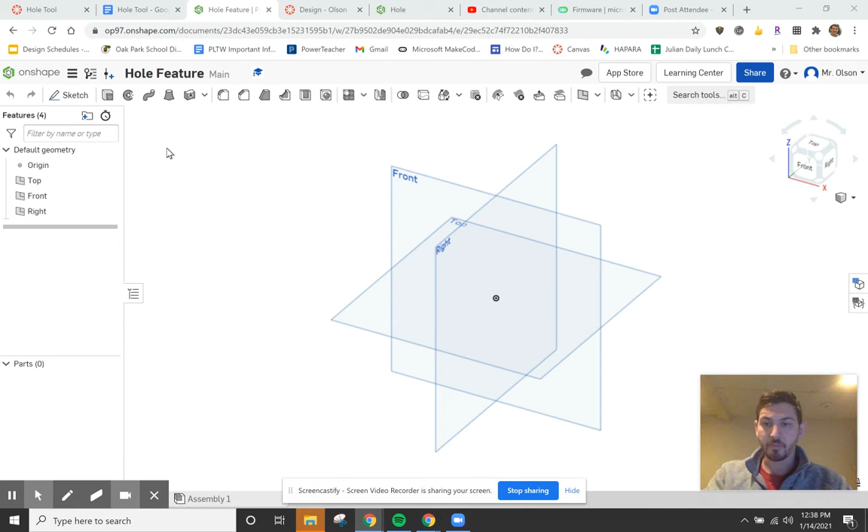Okay, so I'm going to start by getting rid of the planes I don't need. I'm going to change to a 2D view, and I'm going to create a new sketch. And so I'm going to choose my front plane. Go ahead and hide that plane now that I've created my sketch.

And let's go ahead and just make a cube. We're going to make the holes on that cube. I'm going to go ahead and make a 5x5 cube, so I'm just going to create a rectangle. I can type in 5 because I have that box around there, so I'm going to type in 5 and hit enter. Notice the box is switched, so I'm going to type in 5 again and hit enter again.

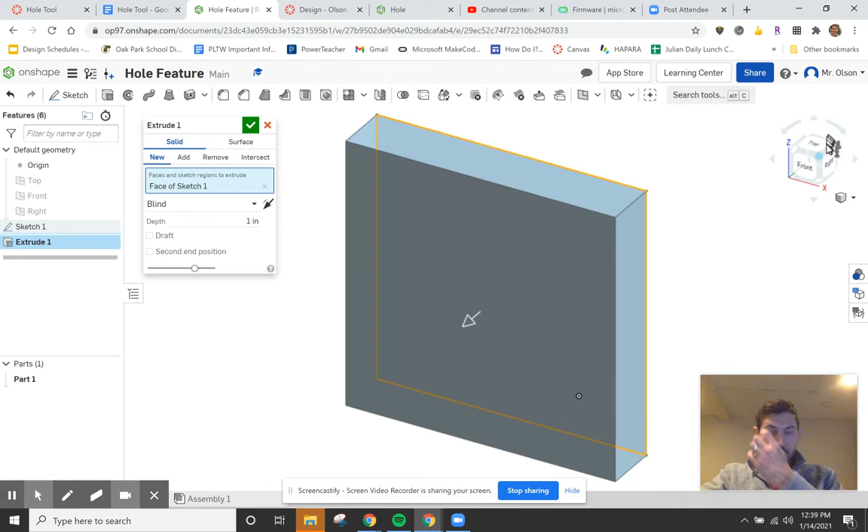And now I'm ready to extrude, so I'm going to finish my sketch. I'm going to extrude this shape. I'm going to click on my shape, and change to my isometric view here. And then I'm going to make it a cube by going out by 5 inches in depth.

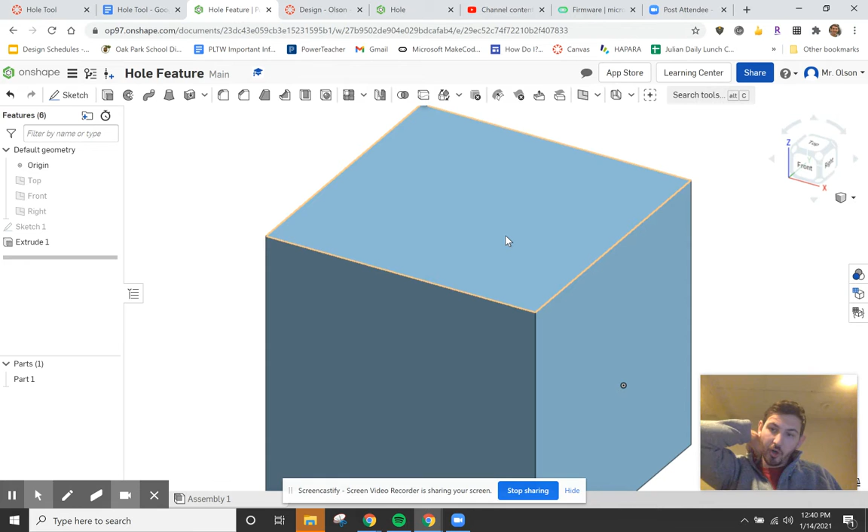Okay, so there is my cube. So now to make a hole on my cube, all I've got to do is create a new sketch, and I'm going to tell it where I want the hole to go by placing a point. So I'm going to create a sketch, and click on the face of my object that I want to create the hole. Let's say I want to create the hole on the top. I can click there. Notice that I now have a sketch plane along that top part of the cube.

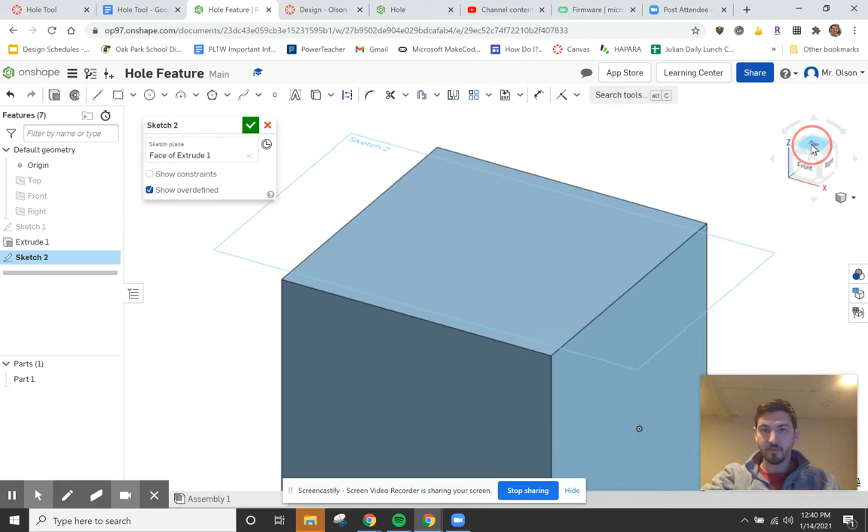I'm going to switch to my top view now, because that's going to look down in a 2D view. There you go. And then what you need to put is a point, and basically that point's going to be the center of your hole. So I'm going to click on point, and select a place in the middle of my cube. Now, let's say I want to center this point and center the hole here.

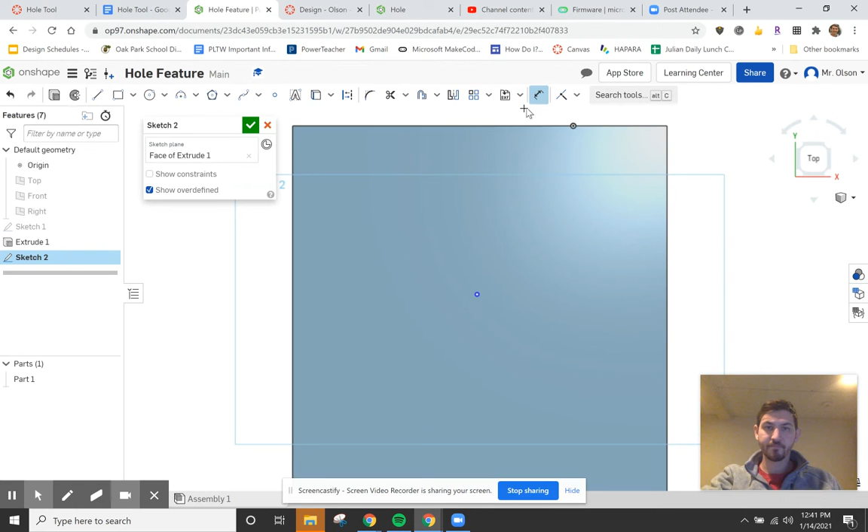You're going to want to use your dimension tool, to say, hey, I want it to be a certain distance from the top to the point. I'm going to click on dimension, click on the top of my cube, or that top line there. I'm going to drag down, and click again on the point, and now I can tell it how far I want it to be. So I'm going to click over here. And the middle of a 5x5 cube, or in this case the square, is 2.5, so 2.5.

Now that is centered from top to bottom, but now I need to center it from left to right. So I'm going to do the same process, but this time I'm going to click on the left line here. I'm going to then click on the center point, and that's also 2.5. So now I have it directly in the middle of my cube.

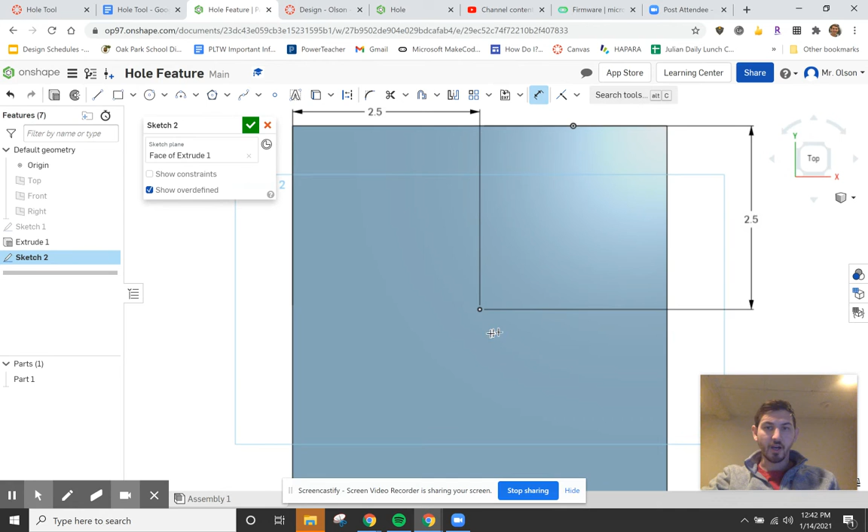Okay, I'm done with my 2D part of this, so I'm going to finish my sketch. I'm going to switch to the 3D view just so you guys can see it a little bit better, and you can see my point right there. Now I can go ahead and use the hole feature up at the top. That hole feature is located right here, in the middle of your toolbar.

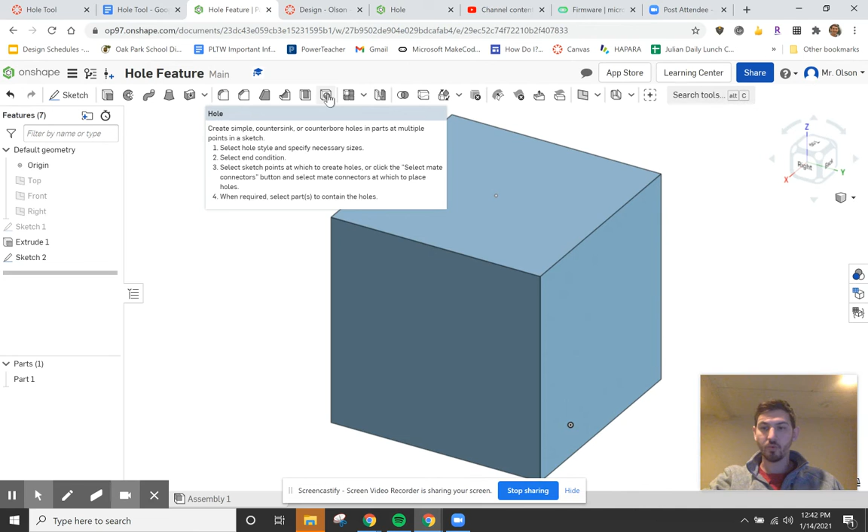And so using this tool, you can make different types of holes. You can make simple, countersink, or counterbore, and depending on what you want, you're going to select it. So I'm going to click on hole.

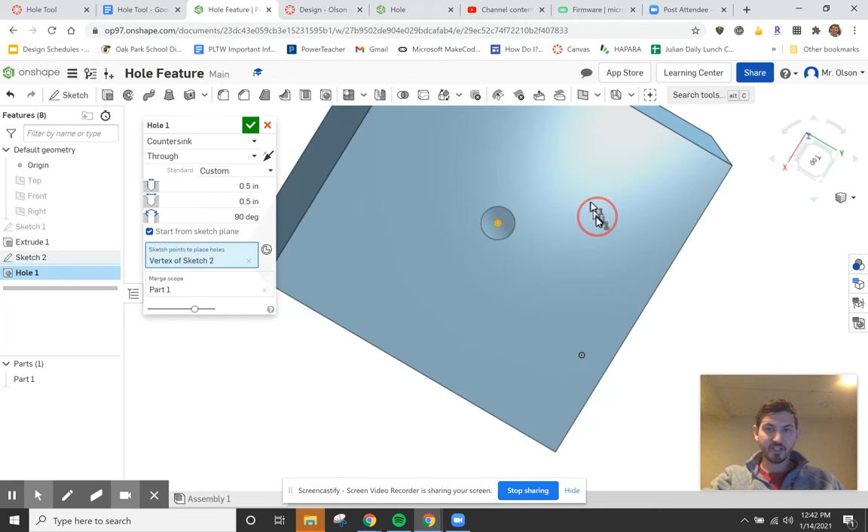Okay, now in order to place my hole on the point, I'm going to go over to my point and click. There you go. And right now, if I change my view a little bit, that's just a simple hole. Do you see how that's just a straight down hole? Basically, this is what if you were to use the extrude tool with a circle, that's what you're getting, is that basic hole.

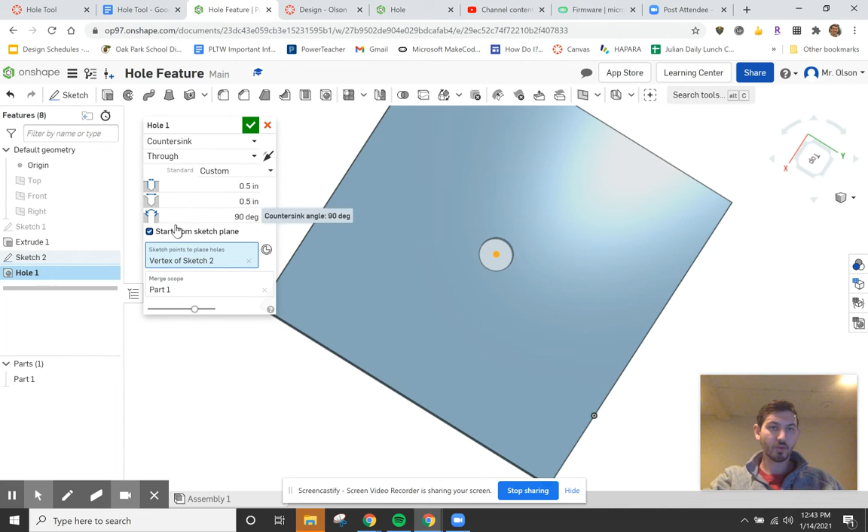This is a better way of doing it still, though, because you have more control over the hole itself, especially when it comes to some of these other features. So over here, you get to select the type of hole.

It looks like actually that was a countersink. I don't really see where that's a countersink. So you have simple, which is straight through like this. You have counterbore. I see why, because your diameter is the same as your countersink diameter.

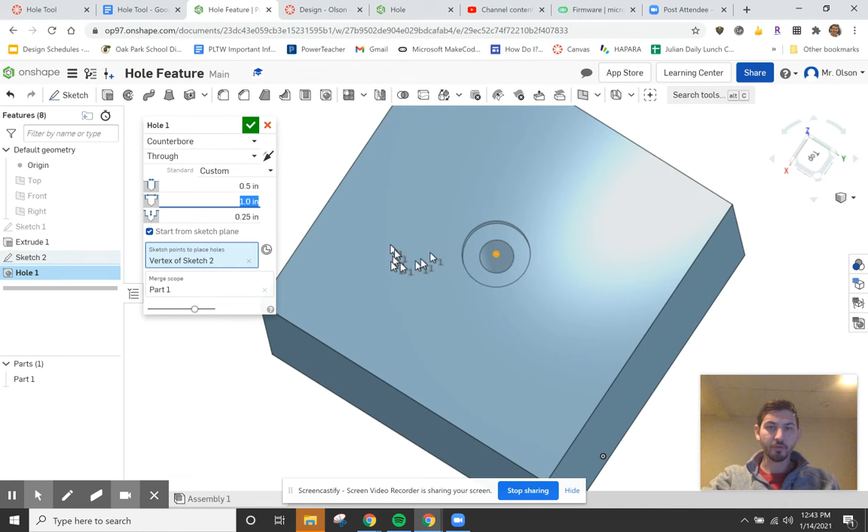And so the counterbore diameter has to be bigger than your diameter of the hole. So you can see what that does is it creates this counterbore. So what a counterbore is really used for is when you have, like, a screw or something that has a headpiece that you don't want popping up above the surface. That allows it to sit underneath the surface but still drill into the object itself.

Okay, and so this is your diameter. So my diameter of my screw is 0.5. That's what I would want here. This would be the screw head. And then this would be the screw head depth.

A lot of times, since you're pretty new at this, if you're doing something specific, it's going to give you those dimensions for you. So you're not going to have to be like, what are they? They'll probably be given to you. But it's nice because if you really have control over what size screw you want, especially when you are creating your own objects. Okay, so when you're done...

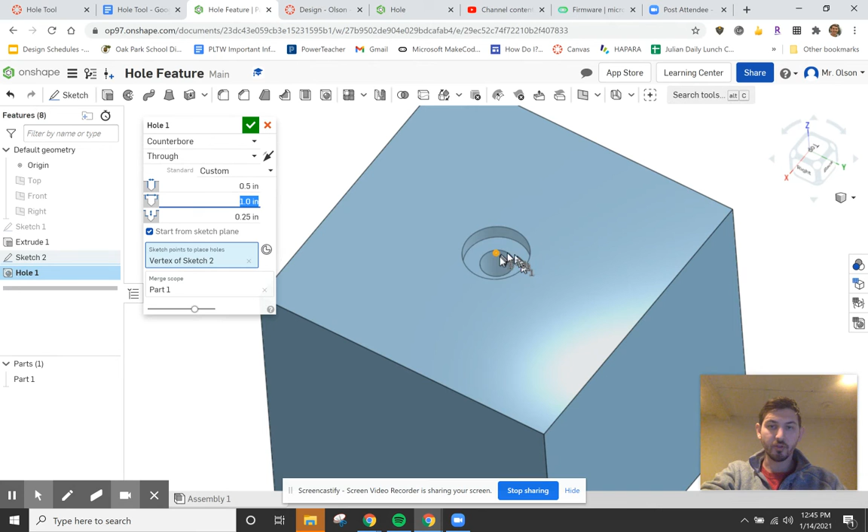Oh, you know what? And the other thing I wanted to show you before I get done with this termination here is through currently. So if I look at this screw hole, it's going into this side and it's going all the way through my object.

So here, if I go to the bottom, you can see my screw hole goes all the way through, and that's a diameter of 0.5 right there. It gives you a better idea of how that counterbore is different.

If you only want it a certain depth, you go blind, and then you can say the depth right here, how deep you want that hole to go. So maybe I want the screw to be a 1-inch screw. Now my screw hole doesn't go all the way through. It only goes an inch into my object.

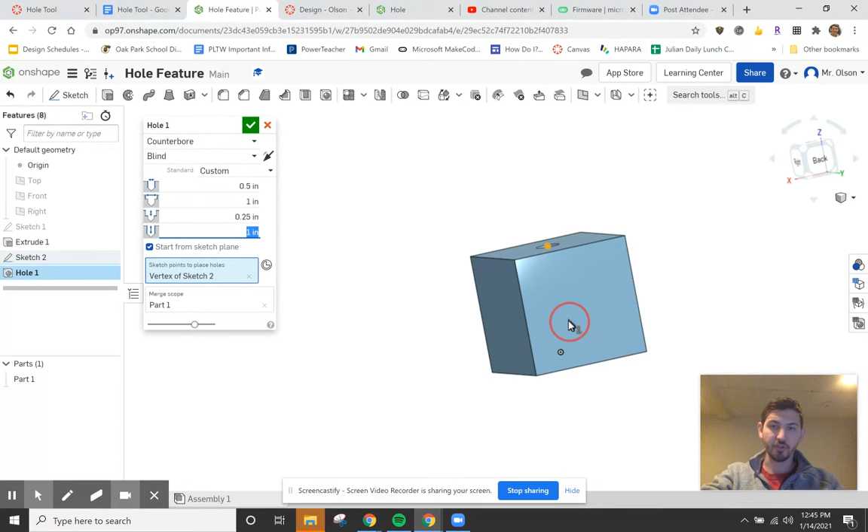You can kind of see that in there. Okay, notice it's coming to a point there. That's where you're getting with the shadows. There you go, the shadow there. Okay, so that is your depth.

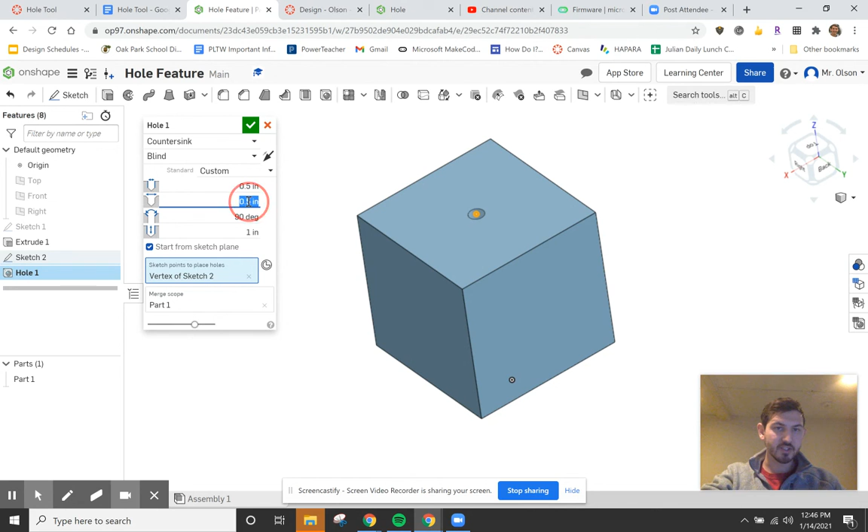Just to show you briefly the other one, countersink, if I click on that, let's say I want the countersink diameter to be 1, just so you can really see it. The angle is at 90 degrees. So you can see here, countersink gives you an angle for specific types of screws too.

So depending on what it tells you to do, you're going to choose countersink, counterbore, or simple. Whenever we're doing this, we'll let you know which of those to use. Okay, but that's where you select it. Here's your diameter, and if you ever forget, just mouse over it. Here's your countersink diameter, here's the angle, and here's the depth of the hole.

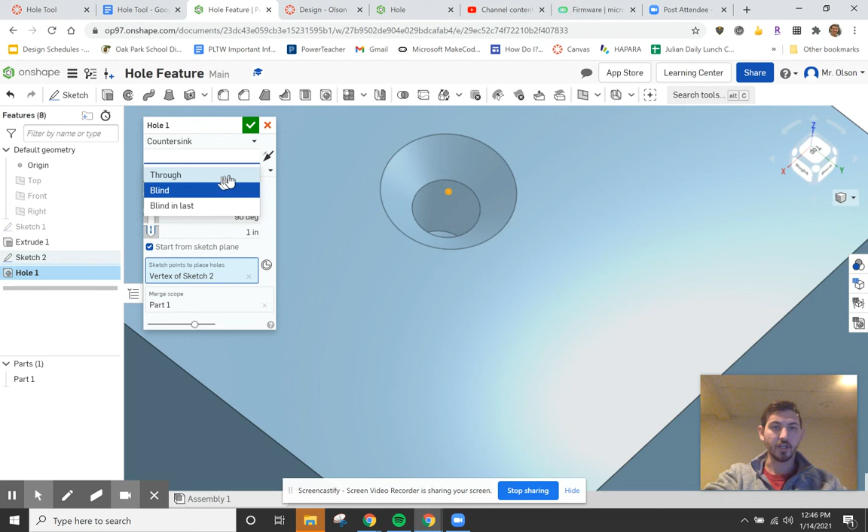And just like the other one, you can also say no, I want it to go through all. That's also an option as well. And that is your hole feature. So you guys are going to be using that later on in the course, so make sure that you are aware of all those different features.